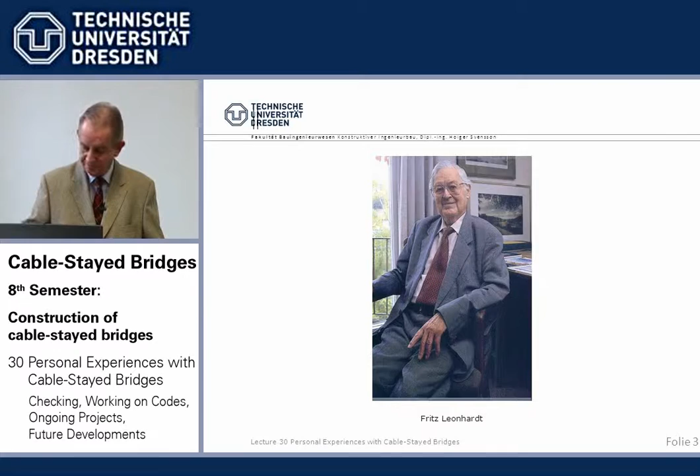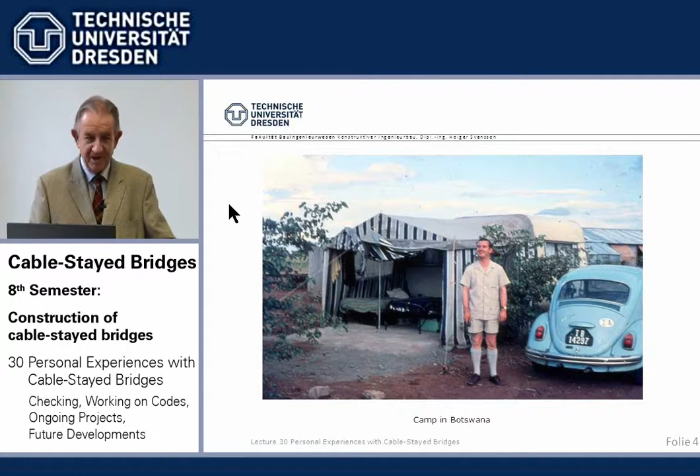So I went there for a year. We were 4 people running the site, 3 from England and myself, and that's how we started. The first time I came up with my Volkswagen from Joburg. We started in tents. I was wearing the usual habit, what we call a safari suit — in South Africa I think it's still used today. I was 25 at that time. Haven't changed a lot, I know, yes.

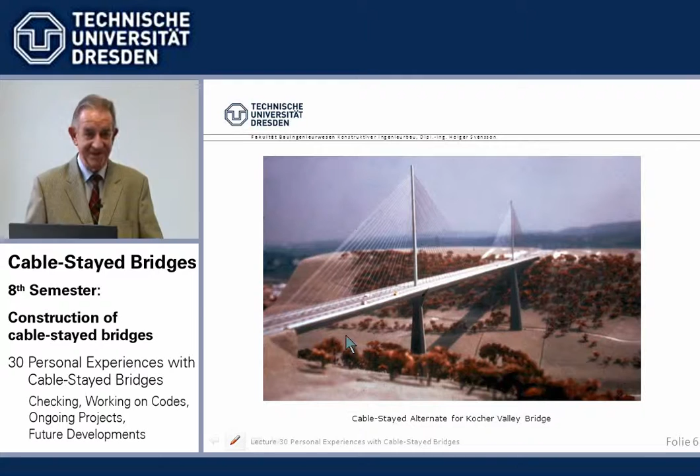After that year I came back and started with Leonhardt's office in Stuttgart, first on some German bridges. I've shown you the cable-stayed alternate there. I did by hand the load configurations for stress influence lines, the Kernpunktmomente, I told you all about it, since I did that for 2 or 3 weeks. I never forget it. I worked on this one early on.

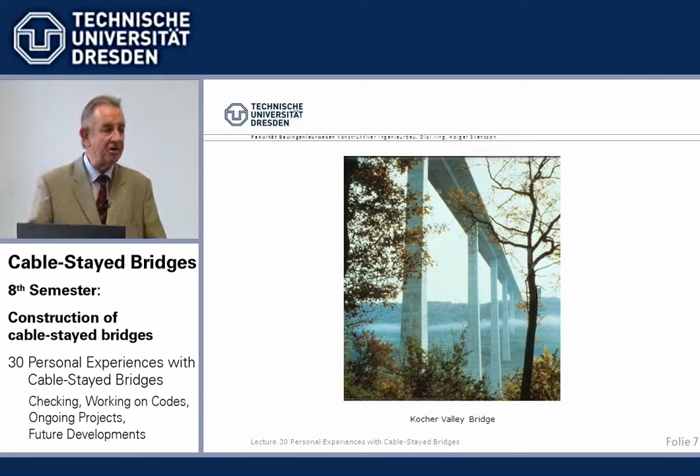Later I did most of the checking for Professor Leonhardt, who was checking engineer for the actual Kocher Valley Bridge, this one, when we could place the piers in the slope.

Then came Neckar Valley, I told you, with the underslung side spans, and here we were not too happy when Leonhardt came up with doing a single pier, because we had the tender design ready, so we had to redo the thing. But he said no, that's important, it's a beautiful valley, we must open it up.

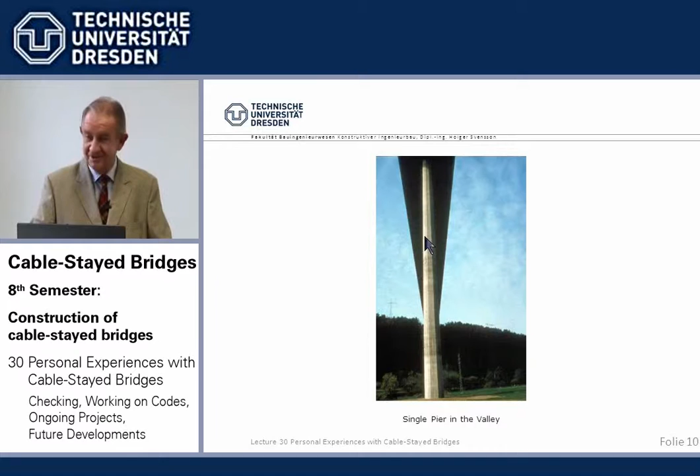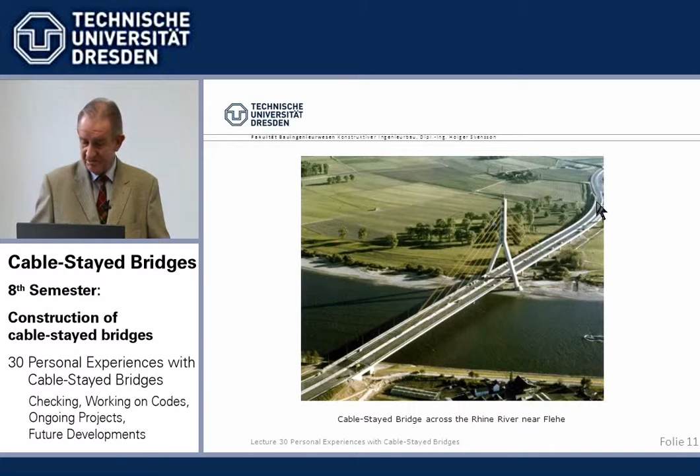Okay, great man. Then came Flehe. We did the detailed design for this part, and I became project engineer here. Very interesting — that was built span-wise with 60-meter spans using a self-launching truss.

We see here the tower is half up, and some of the engineers who worked on it are still busy, and I have contact — it so happened, for example, the steel part was done by, well you probably don't know, Professor Weyer from Dortmund, with whom I'm in contact, and Professor Albrecht in Munich, where my son did his diploma thesis. They worked on the steel part, I worked on the concrete part. It's all early 70s, long time ago, but one keeps in contact.

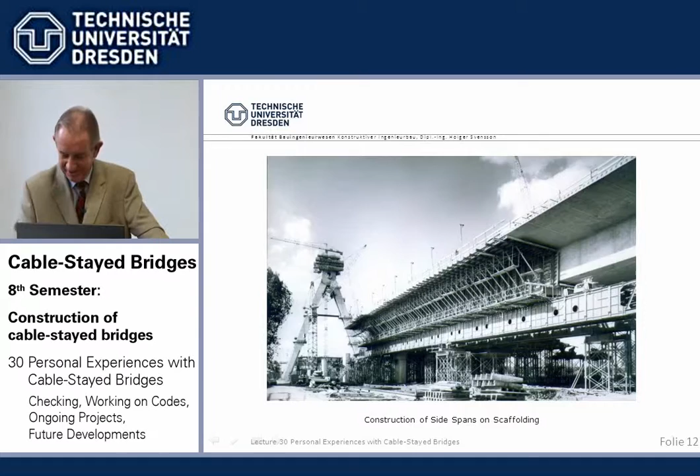That was it then, because then I had to go to the US for Pasco, and only after the reunification did I do bridges in Germany again — for the next 20 years I only did bridges abroad.

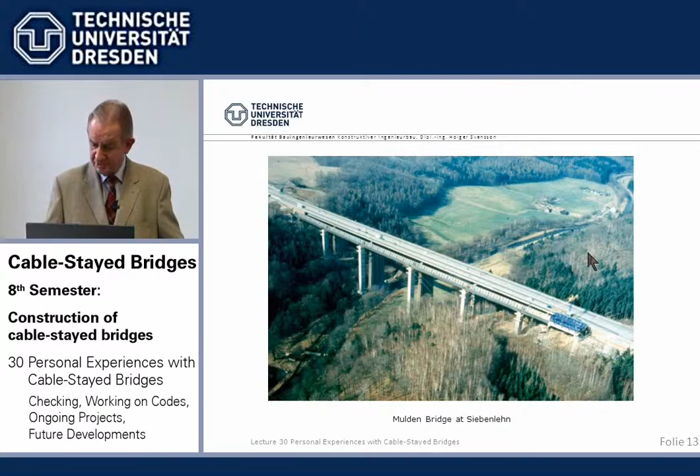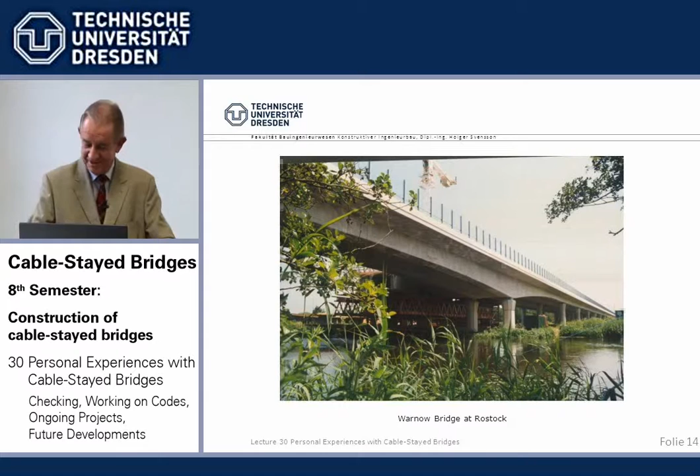Warnow Bridge, A20 at the Baltic Sea, near Rostock. I went for that because after 30 years or so in Stuttgart, I wanted to speak my local North German dialect again, Plattdeutsch. So we gave in a very low offer, and we got the job. It's a 70-meter span. I went to all the meetings myself and found some people so I could speak my dialect again after 30 years in Stuttgart.

Finally, I was quite a bit in charge, although I was managing director, but sometimes I tried to do a little bridge work still. If you come from Dresden into Berlin, the A13 becomes A113, and then you come to the Neuköllner Dreieck, the New Cologne Triangle, here.

Let me look at it. This is the North. You come from here, Grenzallee, and then you go on to Tempelhof. And that's 4 levels: -1, ground level, +1, +2. And it's completely no crossing over.

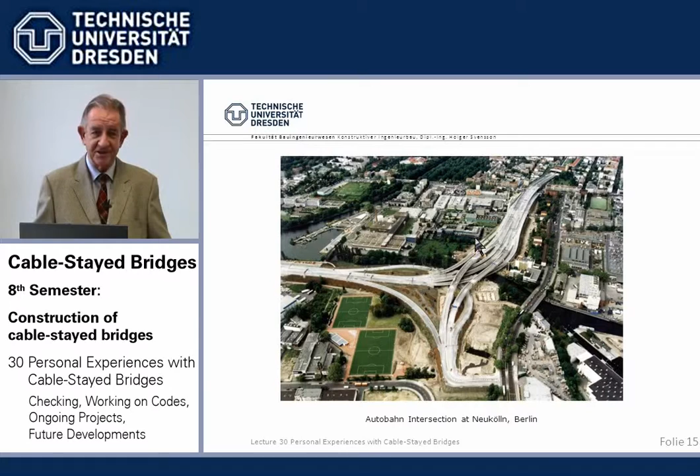So this is what we used to call in the United States a spaghetti intersection. Not so usual in Germany, but it was quite interesting.

And next to it then is this arch bridge, where we said we don't want 2 arch bridges side by side, meaning 2 arches near one another in the center, but we combined the central one into one. So these 3 have similar dimensions, although roughly speaking these have double plate sizes, continuous roadway slab. We think that was done for aesthetic reasons, and I think it looks much better than the usual 2 arches side by side, combining them.

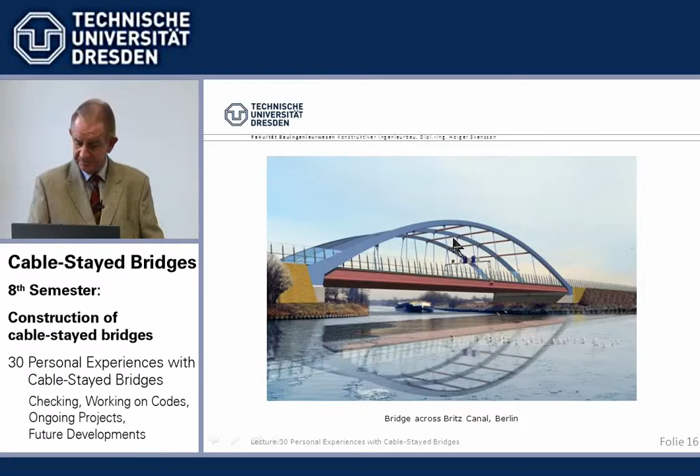Well, cable-stayed bridges, as I said, when I was doing Pasco, I had before 1973 started Pasco Kennewick, but it dragged on, and we had a design so far, and this small American office was supposed to do the rest. And I was told, well, I'll go there and check and see.

In March '76, when I came there, I saw there was nothing there. What was there you could just throw away, no good. And they had started on site.

So I looked at it and then said, okay, I phoned Leonhardt and said, listen, I've got to remain here, otherwise we run into trouble. Then there is construction ready and there's no construction engineering.

So he got it organized, and I phoned my wife and said, listen, you better come over here. Our son was 6 weeks old at that time. So she came, and I had rented a house completely. People were gone away for a year, and borrowed from the office all the children's equipment, bottle warmers and things like that. So my wife came with a suitcase and a kid, and we lived there for nearly a year.

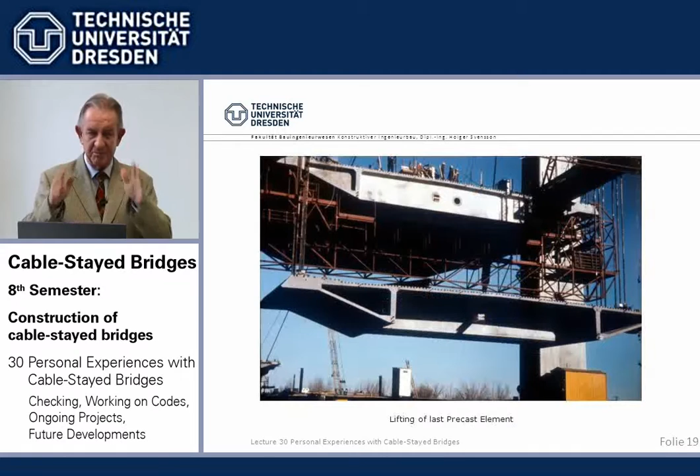But after I had done that, I wasn't afraid of much. We used precast elements because the contractors didn't want to do free cantilevering cast in place, match casting, epoxy joints. I've told you all that, quite new, and it worked beautifully.

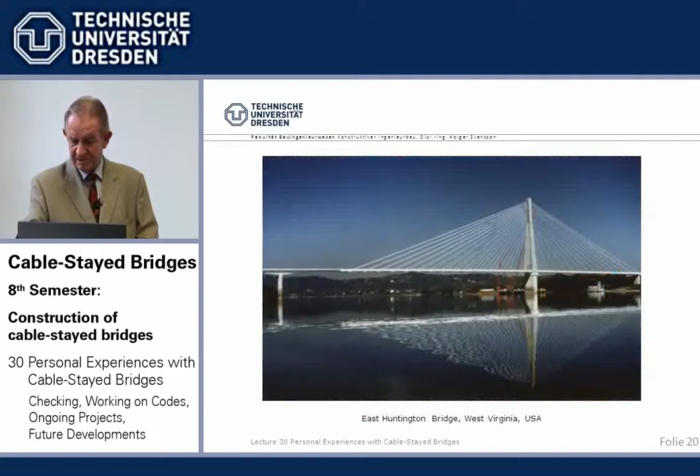Then came East Huntington, also like Pasco, a world record for one side, for one tower only. There, the two piers were there. We used precast elements. Then came Sunshine Skyway.

Now we are already in '81. 15 years I nearly designed only cable-stayed bridges in the US. There were no cable-stayed bridges. We did the first ones. And all the first ones, first we designed them, and then we were in competition, and those we won.

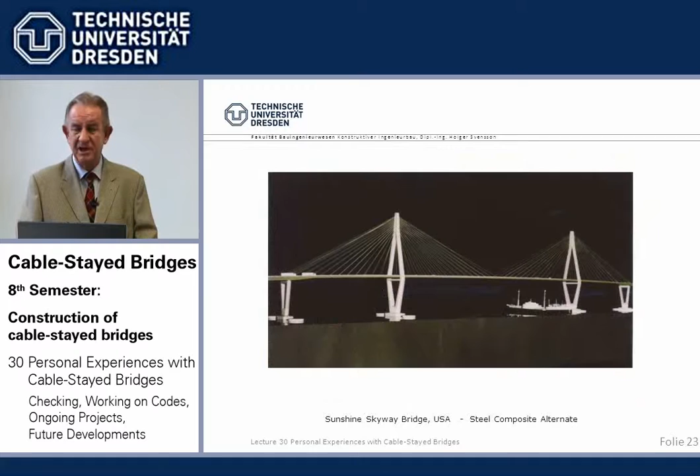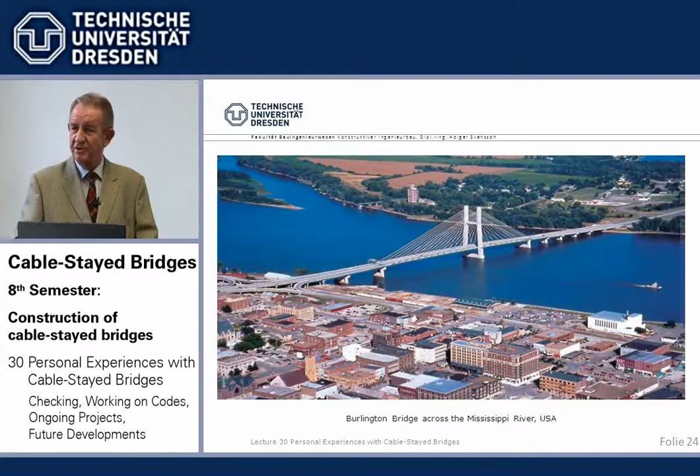So until '89, end of the 80s, I was mainly designing in the US. Tampa Bay we didn't get. Here we had both alternates, steel and concrete, so small wonder one of our alternates was built, the composite across the Mississippi. And then I told you about the ship collision.

We had to do something for one of our bridges in South America, protection against ship collision. And I looked into that and found there is nothing in existence, not in code nor anything else, to determine the equivalent force, the impact force of a ship running into a rigid pier. And to design something, you had to know the forces.

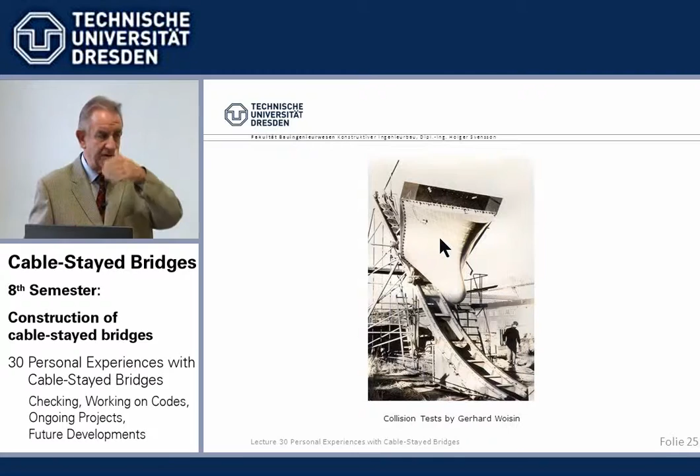These were sizable tests with all sorts of things. I got to know the engineer who ran it, and because I didn't understand anything of that, I looked at it with a fresh view and made some sketches and found out, which strange enough nobody else had found before, that the impact force is proportional with the square root of the ship size.

Very simple, with some factor. This formula has been used now all over the world for determining impact force depending on the size of ship. And I used plus minus 50%, which is true because it depends very much on the construction of the ship's bow.

If you have a soft bow, say an oil tanker is rather soft. If you have a cruise ship, it's in the middle, and if you have a warship, it's very strong. And so ferries are in between. It's better to use this as general, say plus minus 50%, depending on the bow structure and the size of the ship.

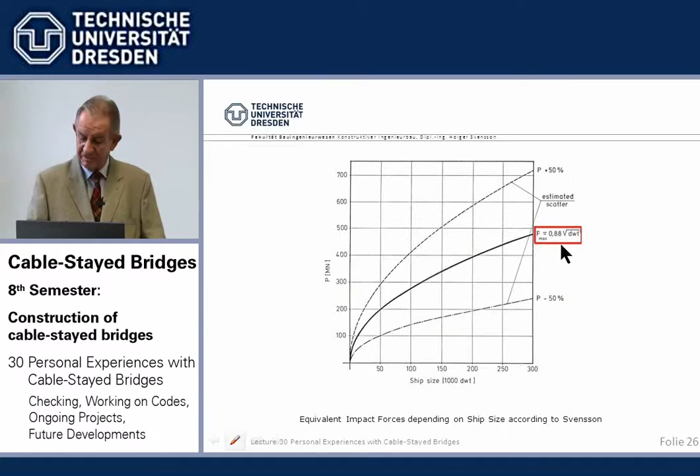Well, that was, of course, too difficult then, and now it's been used with a 75 fractile, then it's not 0.88, but it's 0.98 and things like that. But this formula I found at that time is now used worldwide.

Sunshine Skyway, I showed you our design, which lost. This was the finally used design by Jean Muller.

The bridge had to be built newly because the old bridge was hit by a ship in a rain situation and fell down, 30 people dead. So the new bridge, of course, had to be protected against ship impact by, as we used to say, belt and suspenders.

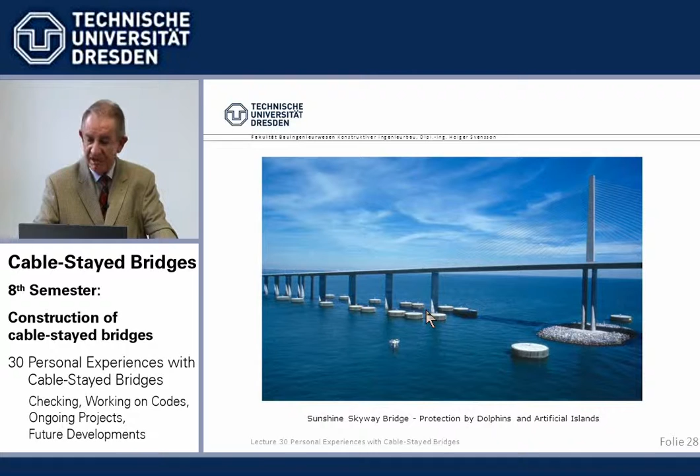What came out was the main towers were on one hand protected by an artificial island, I told you all about it, plus these dolphins, and the side piers were all protected by dolphins. But that was the outcome of this little study on ship collision.

Then came Houston Ship Channel crossing. There was a tunnel which was too small. You see here, that's Houston, Texas, oil producing area, right in the middle where all the oil is processed. On one hand, non-US oil comes in from the Gulf of Mexico through the Houston Ship Channel into the refineries here. And so there's a lot of petrol trucks going up and going over there.

A lot of space required, and we looked into it and found, okay, we'd rather make two separate beams. I told you about it, separate towers.

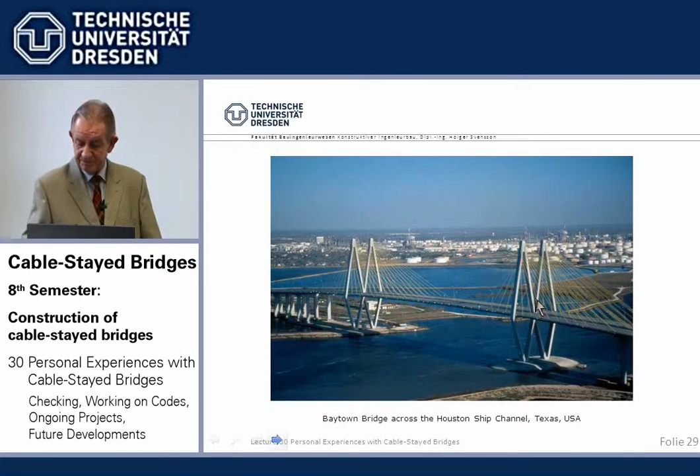It's a hurricane area. I went through a hurricane there. I went through 3 hurricanes in Tampa, Florida. Really we were supposed to be evacuated, but I didn't. We had a first floor there. I said, well, if we are flooded, before I get wet feet, I sit on the first floor. I never went on the road, but we were 3 times asked to evacuate, so I know about hurricanes.

And here we had, for the construction, the governing load was a hurricane, which is 210 kilometers per hour, 230. Not quite as much. Helgeland was 270, was more. But 230 is quite something.

And so we did free cantilevering to both sides, and for a hurricane it wouldn't have been stable. So we tied down, I'm not sure you can see it. Yeah, you can.

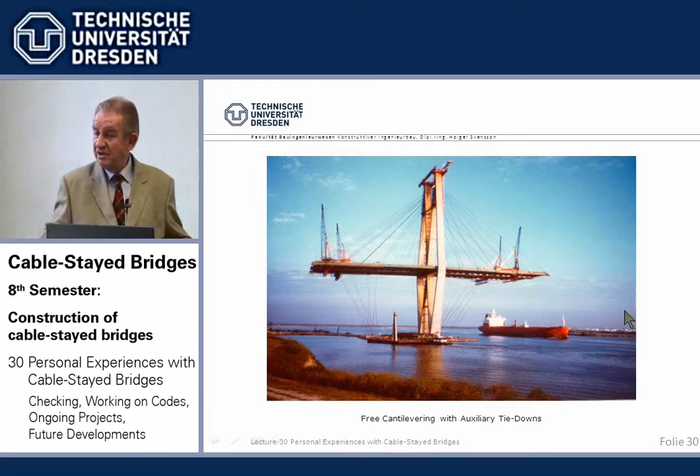There are tie downs, temporary until closure, against hurricane, and a heavy hurricane went smack across the site before center span closure, and the bridge behaved as predicted, was measured, 1.7 meters plus minus up and down at the tip, but everything is considered. So it worked very well.

I told you already about the coloring we took into account, so I don't have to go into that much more.

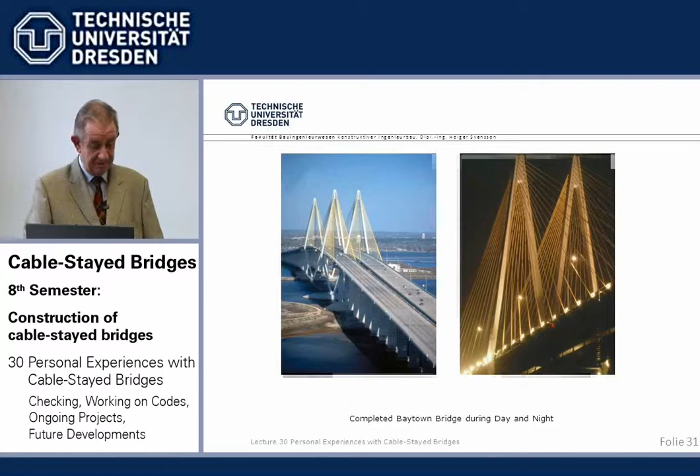In Columbus, Ohio, there is the Scioto River which runs really through downtown. It's partly developed, and there are three I call major true arch bridges, a series of arches underneath. And one of them was obsolete and had to be replaced.

And we got the job together with a local Burgess and Niple company. There was a concerned citizen committee, as is everywhere now in the US, and there were workshops where all the good citizens of Columbus, Ohio could come in and tell what they wanted. In the beginning, what's now being found out in Stuttgart as public involvement, beautiful, we did already 15 or 20 years ago in the US.

And they said, no, we wanted a slender bridge. They said, no way, we don't want a highway bridge, we want an inner city arch bridge. Yes, but a true arch, they couldn't pay for. So Leonhardt finally came up and said, okay, we do what we call a plate arch. These are actually just plates, deep haunched girders, 1 foot thick, 30 centimeters, with a haunch.

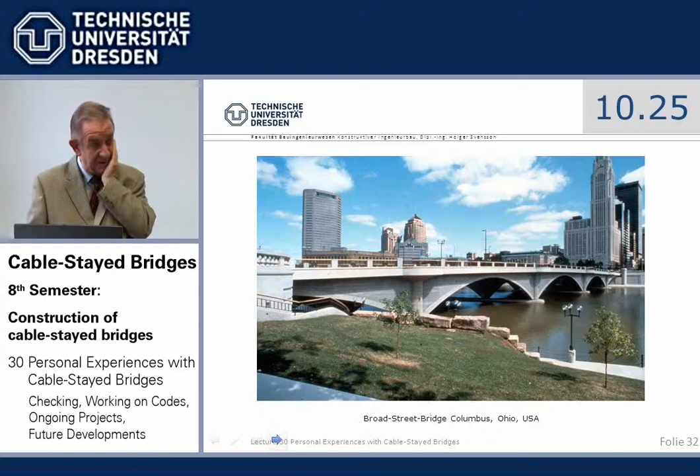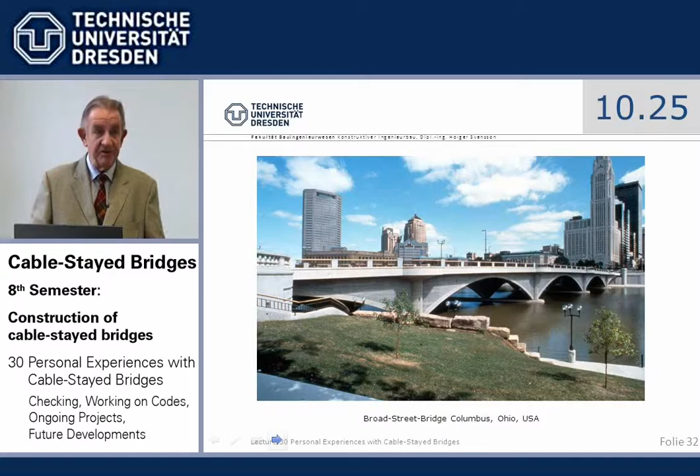If you look underneath, there's no arch in between, but they look good enough as an arch, and they were payable. That's how this, I think, very nice bridge came about. We had a good architect - what was his name? From H2L2 architects, originally a Pole from Poland, Tom Piotrowski. He was the architect there, now head of H2L2. So I think we made a nice bridge together with the concerned citizens of Columbus, Ohio.

Then came the big competition, the Annapolis Bridge I told you about, where I think we won because we respected the history of the Naval Academy.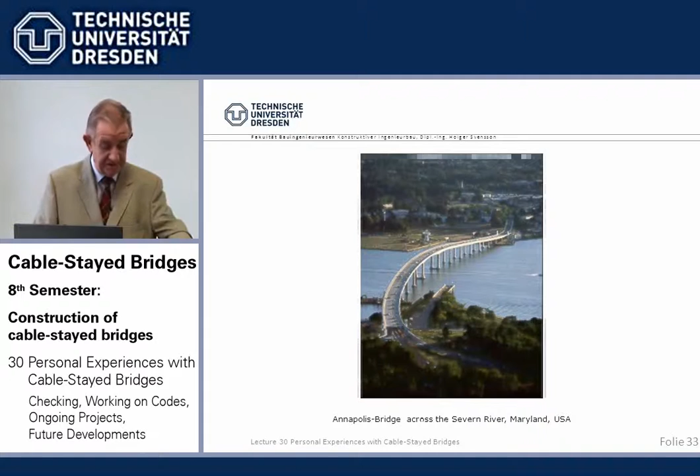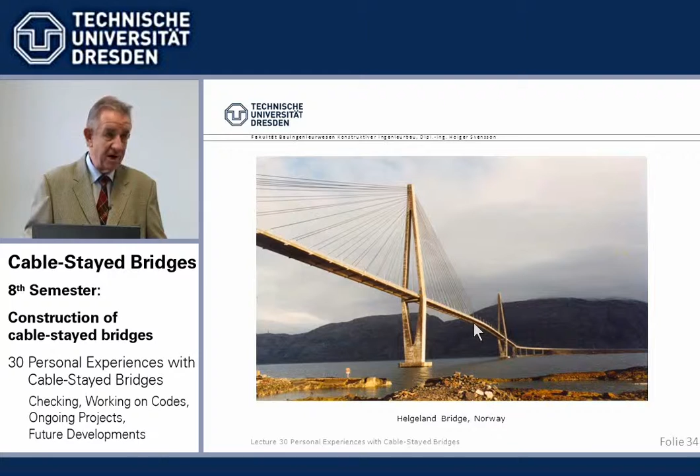And then came what I personally call the most daring bridge I've ever done - I told you all about it. 425 meters, 1.2 meters deep, on the west coast of Norway at the polar circle with real heavy storms. This is a picture early in the beginning, and that is, in German, called Gischt - the water drops being pushed up by storms of 250 kilometers plus.

But it worked. It still stands beautifully, and of course the most critical part is just before the center joint closure, where we had 210 meter free cantilevers. Every winter, from fall to spring, two-thirds of a year, there are these heavy storms. I'm not sure, knowing what I know today, whether I would have dared these skinny dimensions we did at that time.

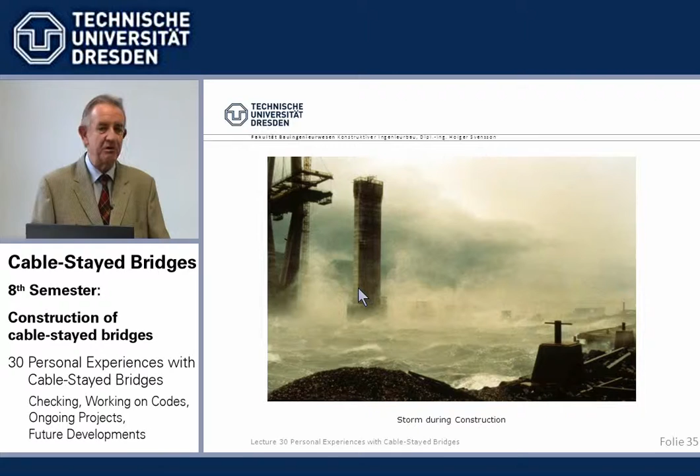But Dr. Kovacs did all the aerodynamics and said it works, and I believed him. You can't do more with this voodoo dynamics these people do. As a regular engineer, you can't really understand and check - you have to believe somebody. But we've worked so long together, and he was right, it worked. But I'm not sure I would do the same again today.

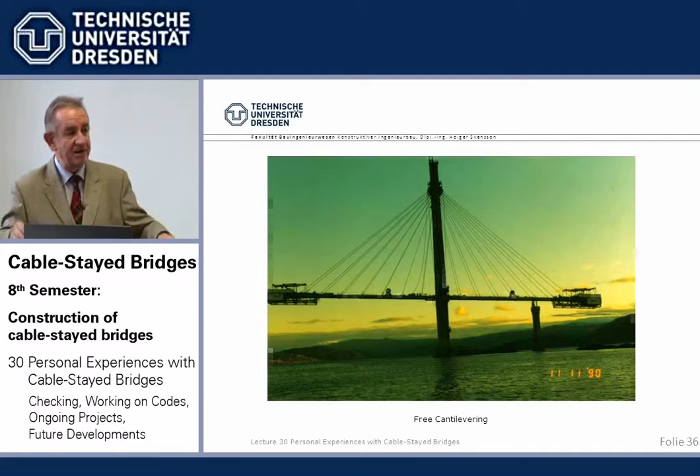Of course, there was also beautiful weather, and free cantilevering then to both sides, cast in place, where we had the final cable supporting the traveller. I told you all about it. Then, now here we go.

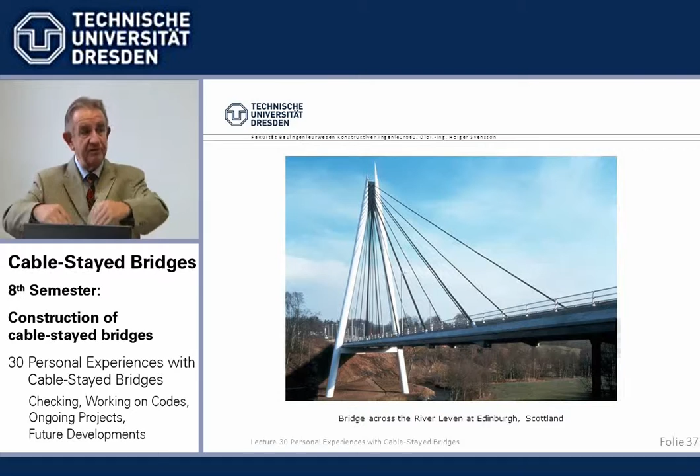Scotland, here we come. The Leven River Bridge at a new town north of Edinburgh. We did this with an architect, completely built on scaffolding, no post-tensioning, taking into account cracked section under service life load and load redistribution for the cracked concrete section. Normally we have post-tensioning, then there's not much cracking, but here it was only reinforced, so we had a lot of cracking, a lot of redistribution of moments. That was a special thing here.

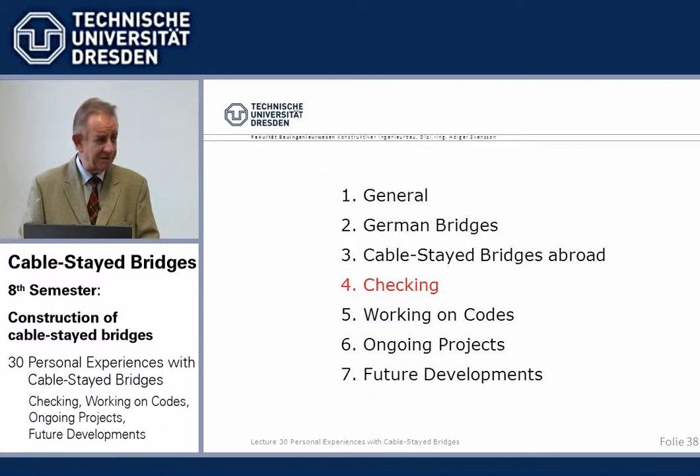In addition to designing, one can't avoid checking. It's not a real interesting job - I'd rather design a structure than check it, but sometimes one has to do it. I could not become a checking engineer in Germany because for that you have to show 10 buildings, and I was never considered clever enough to do buildings. I was restricted to bridges, so I could not become a German checking engineer. So I did all my checking abroad.

For that you need a registration as an engineer there. For example, I started PE, professional engineer in the US, which is, after getting your degree, accepted and all that. It's two written examinations, each hour, eight hours each. I did that back to back, Thursday and Friday. After I passed, my colleagues in America said, well, maybe he isn't as stupid as we thought, because the PE exam done that way, back to back, is not normally done in the US - you have some years between.

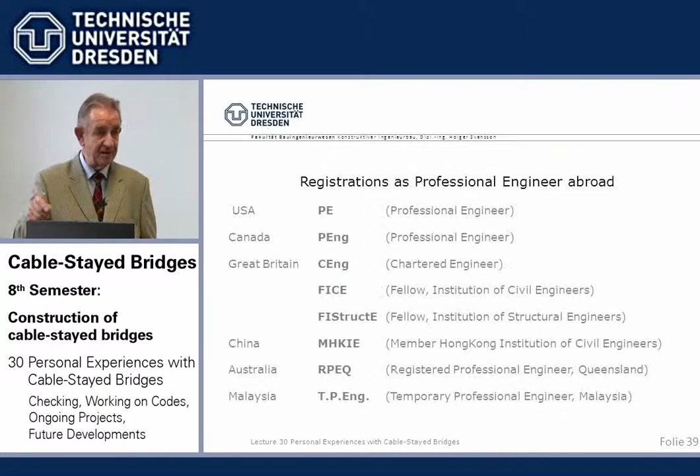In Canada, I had to do an additional exam on Canadian law, which is basically British law - the House of Lords is still the highest appeal in Canada and things like that. In the UK, I had one hour verbal, one hour written, and after you've become a chartered engineer, you can then become a member of the Institution of Civil Engineers and the Structurals. In China, Australia and Malaysia, they believed me, and I didn't have to take exams for that. So in all these countries I've checked and I've designed. You must have that in order to be able to sign a drawing, and to be a checking engineer where you also have to sign.

Roosevelt Lake Bridge in Arizona, right in the middle of a desert. We did a major bridge because there's a dam, ein Staudamm, there in Arizona. An arch was done and we were checking, and the engineers had never done that, the contractor had never done that either. So our checking was more to tell them how to do it. But anyway, it worked out quite nicely. It's a 310 meter span, something like that, tied back free cantilever. It was an interesting thing.

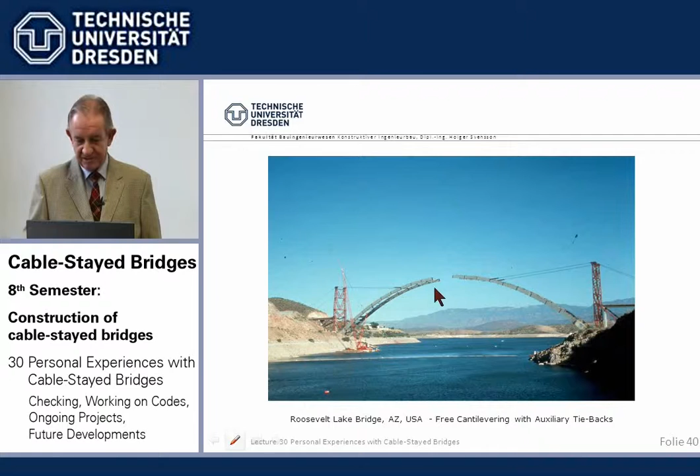Norway, Svinesund, across Norway and Sweden, we had a design for an arch bridge, but we didn't win. Bilfinger's design won, Bilfinger and Berger, and they had to bring check drawings, so they have to pay the checking engineer, but he has to be accepted by the state. Since I had worked in Norway and Sweden, and from my name, Holger Sigurd Svensson, I was considered an honorable Scandinavian - that's 150 years ago that my great-grandfather came from Sweden to Germany. And so I became, with this and other bridges in Sweden, checking engineer.

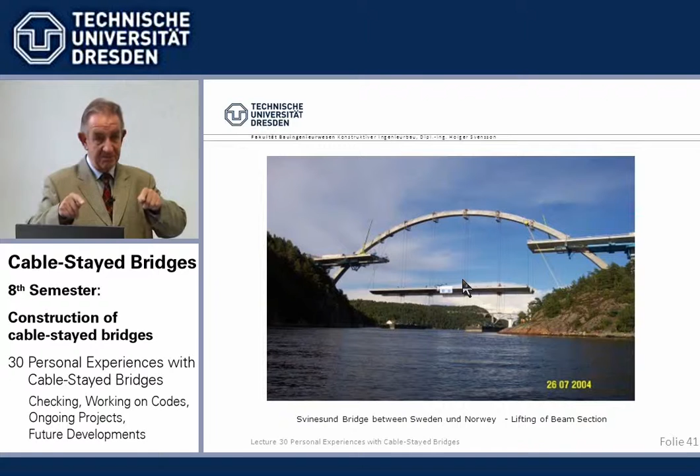It was very interesting because it was a tricky job, slender arch and 2 independent box girders, and the torsional stiffness of the whole structure came from the torsional stiffness of the 2 beams. Was interesting.

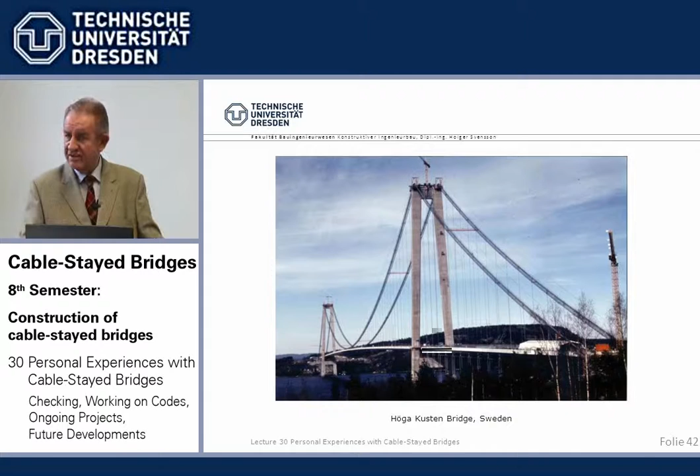Then came Yangpu checking. The World Bank gave, or was supposed to give, $100 million loan to China to build the Yangpu Bridge in Shanghai, 602-meter main span, world record at that time. And the World Bank said, that's okay, but we want to check it. So they had 3 checking engineers: Walt Podolny, chief bridge engineer from Federal Highway Administration in the US - we knew one another well - plus the Japanese. We checked all that, and it was very nice.

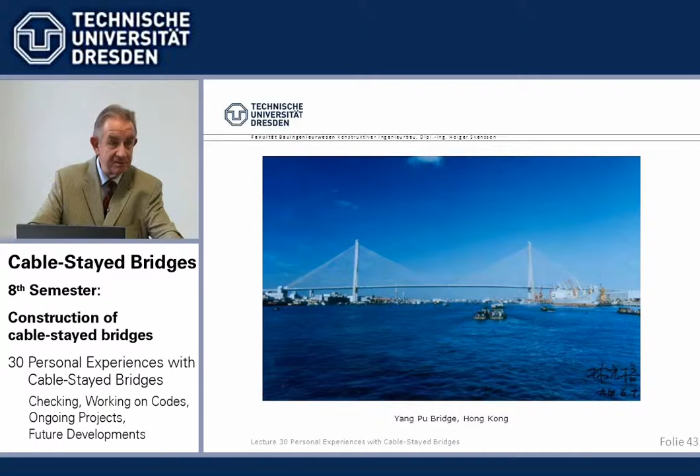At the end, I had to give a TV interview after the contract was signed. They asked me about the impression. I said it was very well done, we had very little to criticize. However, I say that with a laughing and a crying eye. Laughing because as a check engineer you are more happy if you can sign it off than if you have to say no good, do it again. Crying because I saw no jobs for my company, Leonhard Andra and Partner - they can do it themselves. And that's what it was. We've never had a major job in China.

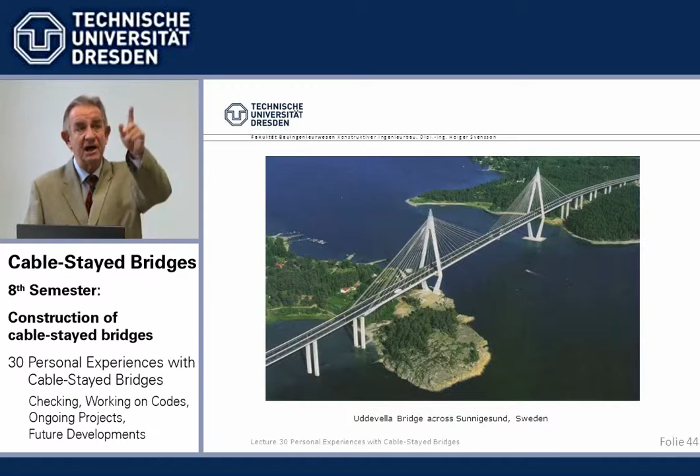Sweden, Uddevalla - we had a design with Skanska, I think, but weren't successful, if I remember correctly. But I got the checking, so we worked on the checking of Uddevalla. That's also along the coast between Malmö up to Oslo, E6. Ume älv, another cable stayed bridge where I was checking engineer.

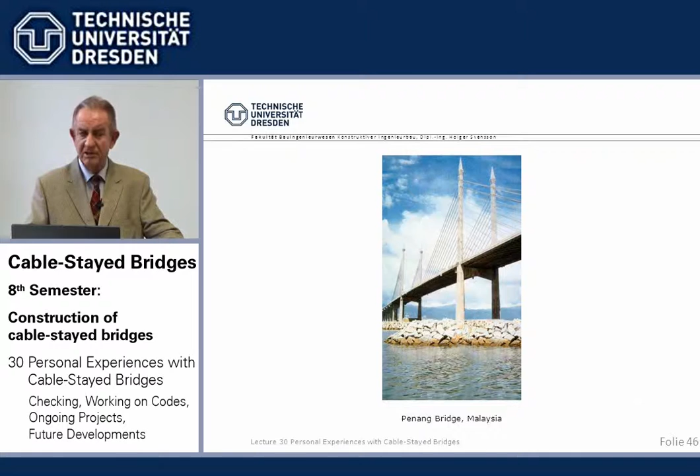Interesting was the Penang Bridge in Malaysia. Penang is a major island in the north of Malaysia, where it then goes into Thailand, and it's been since many years a holiday resort. So to develop that in the 70s, I think, the Penang Bridge was built, and we checked it for new loads, and finally it came out okay - reinforce it somehow, but otherwise it was okay.

Golden Ears Bridge in Vancouver, Bilfinger design, where I was checking engineer. Last year, I think it was opened. Interesting because it's a difficult earthquake situation. You can imagine going up California, up into British Columbia - it's not the San Andreas Fault all the way, but it's highly earthquake prone.

And the solution here, which you may recall, hopefully, from Rion Antirion, was that between the soil and the foundation is about something like two layers of aggregate, which in earthquake permits plastic sliding. That was also used here, and we had long discussions due to the time difference, around midnight, of course - telephone conferences with people in the US, in Canada, checking my geological specialist and so on. But we accepted it, and hopefully it works.

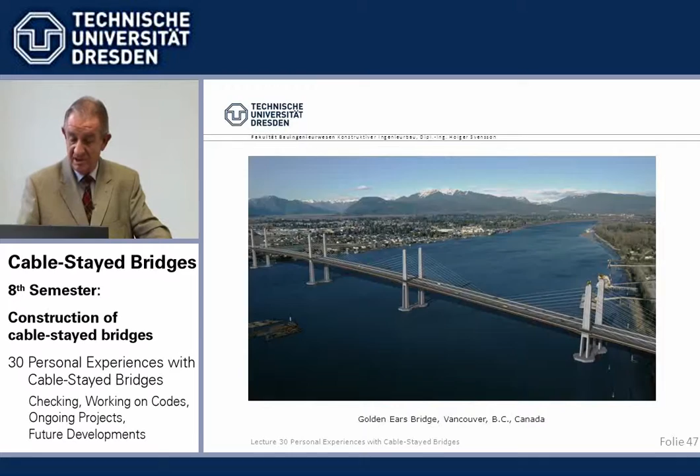I've worked, and then we'll stop, in the US. In the 15 years I have worked mainly in the United States for Leonhard. I was, of course, then in code commissions. We did the first code for parallel strand and parallel wire cables within the Post-Tensioning Institute, which is now part of AASHTO. We did the first guide specification for vessel collision design - I had worked on that, so I was in the AASHTO committees. And we did the first segmental concrete precast elements, but actually it wasn't that - the main point was the first box girder code conditions, because there was nothing in the US. You use the single span AASHTO girders, and that's it. So these were important new codes which were incorporated into the AASHTO.

I think that will give you a rough idea that I had all sorts of interesting jobs to do, and I've stuck 40 years to what I said at the end of my school days - I want to design major bridges all over the world. And I'm very thankful that I had this opportunity, and I wish you, this is the last lecture we have together, that whatever you want to do, whether bridges or buildings or it doesn't matter what, that you find an opportunity and that you like it as you hope to do now, and that you stick to it. I wish you all the best.